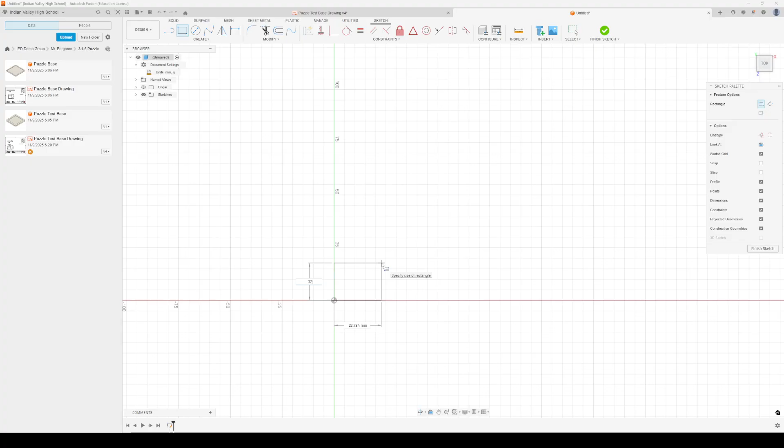All right, and then I'm going to go up to the 2-point rectangle tool and draw a rectangle starting at the origin at 32 millimeters by 32 millimeters. Okay, and so I'm going to go back to the drawing really quick. So we know this opening is 32 by 32. And so our first piece that we test is going to be exactly that. It's going to have no gap, and we're going to expect that that's not going to fit.

Okay, and here's the difficulty and kind of the tedious part with this: in order to make a bunch of pieces that are the same, we need to always come back to these two dimensions and change them every single time. So let's say we 3D print this. This doesn't fit. It's too tight. So that means I need to come back into here and change this dimension. And I also need to change this dimension.

And then let's say that doesn't fit. Then I need to come back in here and do that same thing over again. I need to change this and then this dimension. So it can be quite tedious to constantly be changing dimensions that we've already put in here. And there is a faster, efficient, and easier to understand way to do it. And I'm going to show you how to do that right now.

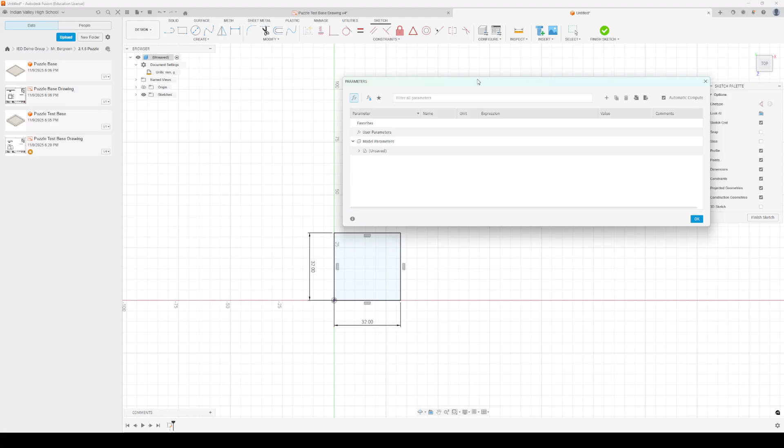Okay, so what we're going to do is go up to Modify. We're going to go to this menu right here called Change Parameters. So this is a parameter menu, and basically a parameter is a named dimension or a named value, a variable. So what we can do is we can create a parameter by clicking this plus sign.

We can ignore this menu for now, and we can give our parameter a name, and in this case we're just going to use the parameter called clearance, and that's going to represent the gap, or the difference in the size between the opening of the base and this puzzle piece. Okay, and then we're going to leave that at millimeters, and we're just going to leave it at 0 for now. Then we'll click OK, and so that will be our first parameter here.

Okay, and if we wanted to come back in and adjust this, if I wanted to make this a different value, I could just click on here where it says expression and just change that to whatever value I want. I could change it to 1 millimeter. Okay, but for now I'm just going to leave it at 0. And we'll click OK.

All right, so going back to the drawing really quick. We know that that opening is 32 by 32. Right now my piece is exactly those dimensions. And if you think about how that's going to work, it's going to be exactly the same size, and that's probably not going to work. It's going to be too tight, and it's not going to go in. So what we need to do to make that clearance is we need to make it just a little bit smaller than what the actual dimensions are.

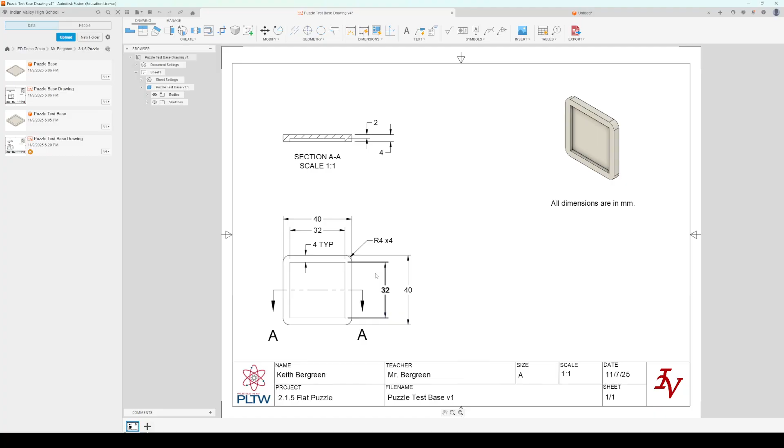So if we go into my model again, what we want to do instead is do the base dimension of 32 minus the clearance. And you'll notice as I start typing that parameter, it pops up down here, and you can just click on it rather than typing the rest.

And then we can just press enter, or we can click off of it. And you'll notice the style of the dimension kind of changed. It now has this f of x, meaning that it's a calculated value. And if you double click on it, you can see that it's doing 32 millimeters minus clearance. We want to do the same thing down here. So let's change this to 32 minus clearance.

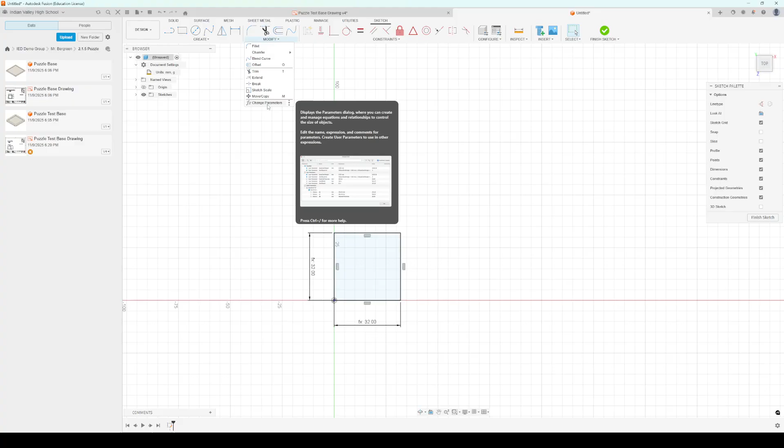Right, and then I'll show you, if we go back to our parameters menu, if I change this to 1, you'll notice it's going to change these values. It's going to automatically calculate this for us. Okay, we'll go ahead and change this back to 0.

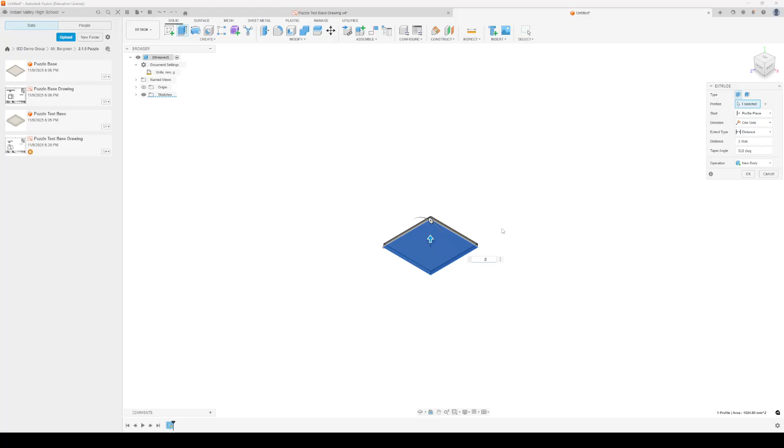All right, so let's go ahead and finish this puzzle piece. I'm going to click Finish Sketch, and then we'll extrude this 2 millimeters. And we're going to put another sketch on the top to help us label and identify what the clearance is for this piece. All right, I'm going to go to the text tool, and we're going to go from top left, bottom right. Now it's going to put some text right here.

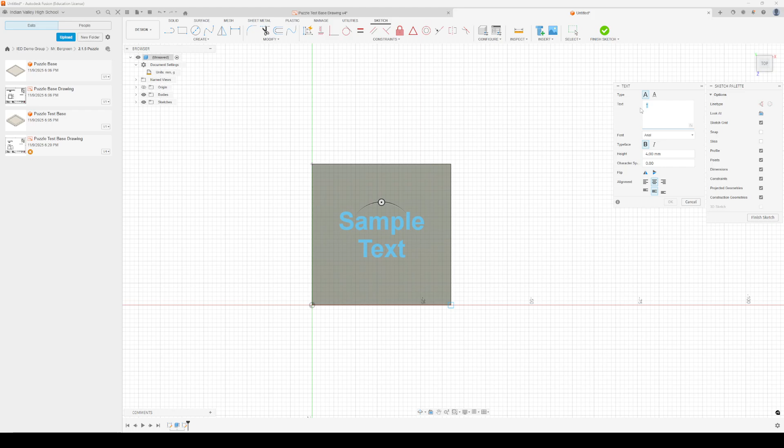You'll notice in this box over here that it creates, there's some quotes in here. We want to delete those. And we're going to type our parameter, our clearance, in here. You can go ahead and click on it. And you'll notice instead of writing the word clearance in here, it puts the value of whatever that parameter is set to. And right now it's set to 0 millimeters, so that's what it has on there.

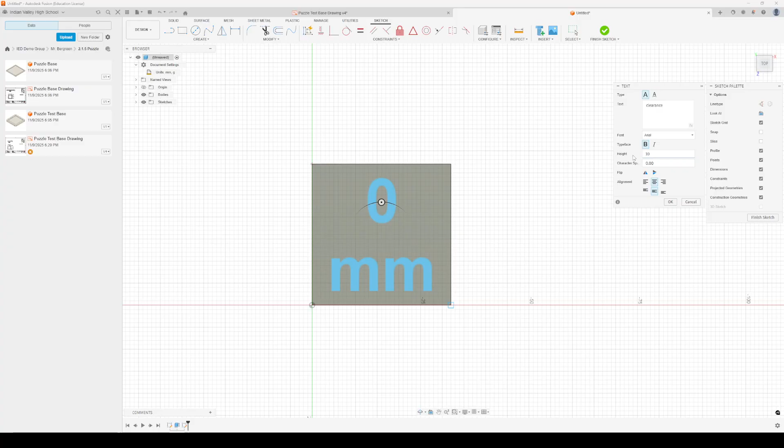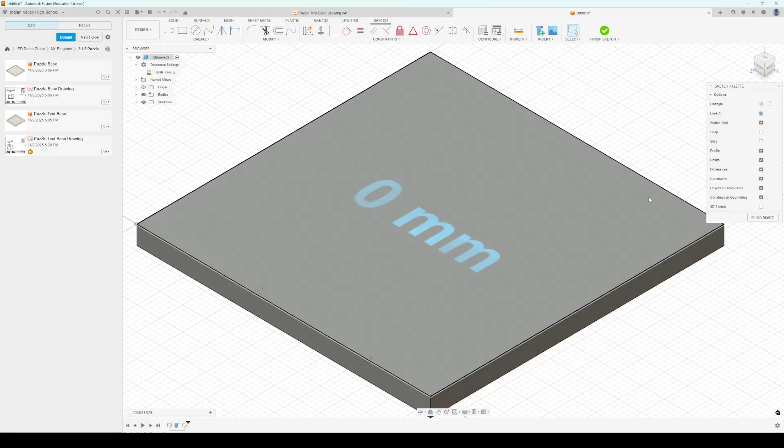Okay. You may have to adjust the height. For me, height was set to 10, and you can tell that that is way too big, so I just dropped it down to about 4. And I would bold it just to give the text a little bit more thickness. And then the alignment for me to start with, it was in the top left. I would go ahead and align it to the center and the middle. And then click OK. And then we're just going to extrude the text up a little bit.

So go ahead and click over here where it has profiles. Right now it's selecting the entire top face. I don't want that. I just want the text. So click the X and then just click the text. And we'll say 0.4 millimeters for that, and then press enter.

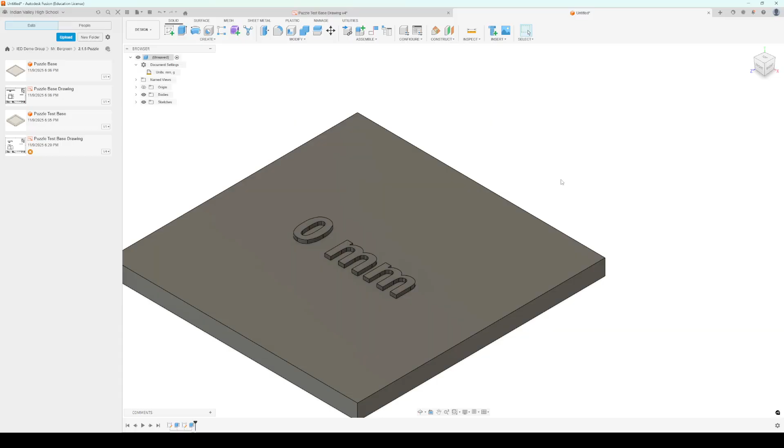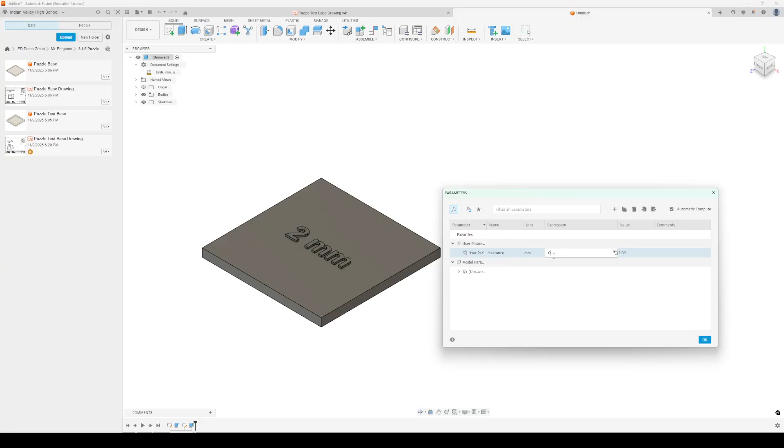Okay, and just to show you one more time with the parameters menu, if we click that, again, if I change this, not only does it change the size of the square, it changes the label with it automatically. I don't have to go into those sketches. I don't have to adjust extrudes or profiles or anything. It just does it. So we're going to leave this first one at 0. And let's go ahead and save this as our puzzle test piece.

Right. And what I would recommend, since you're going to be 3D printing a bunch of these, probably about 4 or so. I would go to File, Export, and then as you export each one, next to the name you'd do puzzle test piece, and then I would write whatever the clearance value is set to. So right now this is set to 0 millimeters, so just write 0 millimeters on the end, and then change this to STL.

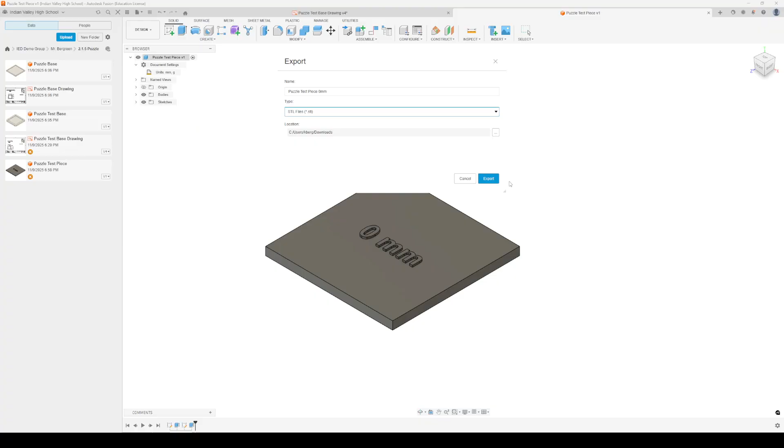And then you can export that, put that in your flash drive or something, save it, and then put all of these pieces wherever you put these. And then again, all you have to do to change this now is go into modify, change parameters, and I would change them by 0.05. So I'm gonna change this to 0.05 and make that my next piece.

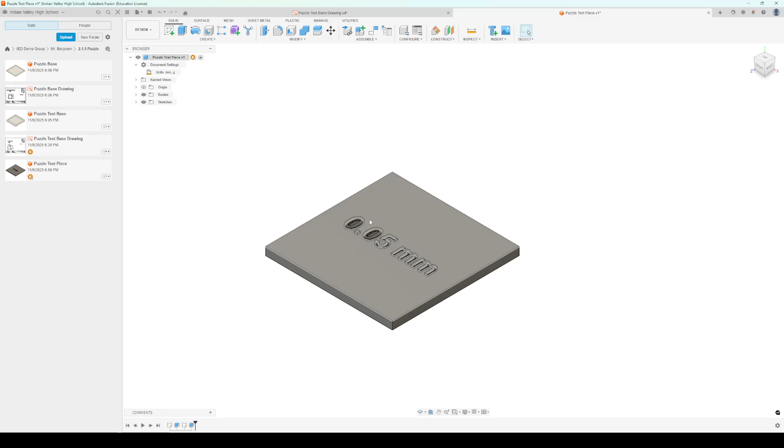Okay, and then you'll just repeat the same process. Go to File, Export, change the name so it has this clearance value, so you know which one that is, and then go down to 0.1 next, and then 0.15, and maybe do 0.2. Okay. And then you can 3D print all of these along with your base, and that'll be that. Hopefully that works.